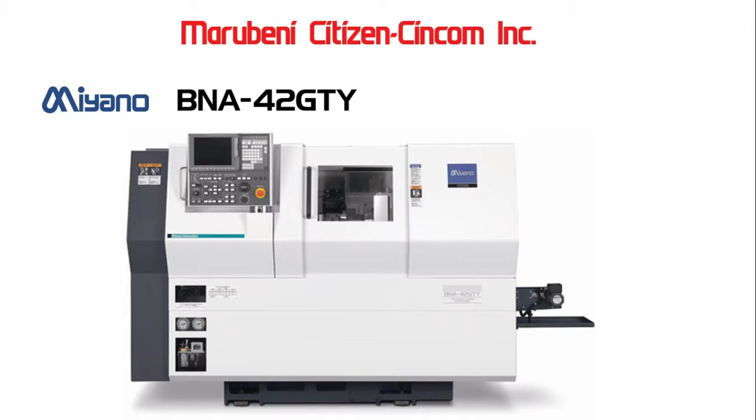As you can see, the machine has a very small footprint. It weighs approximately 8,250 pounds.

The bed has been constructed like a platform to maintain flat surfaces and reduce deformation and distortion to minimize the effects of heat. The spindle and tool slide are mounted on this smooth and uniform surface, so even in the event of thermal expansion, the displacement is all in the same direction, which means that relative dislocation between the workpiece and the cutting tool can be controlled.

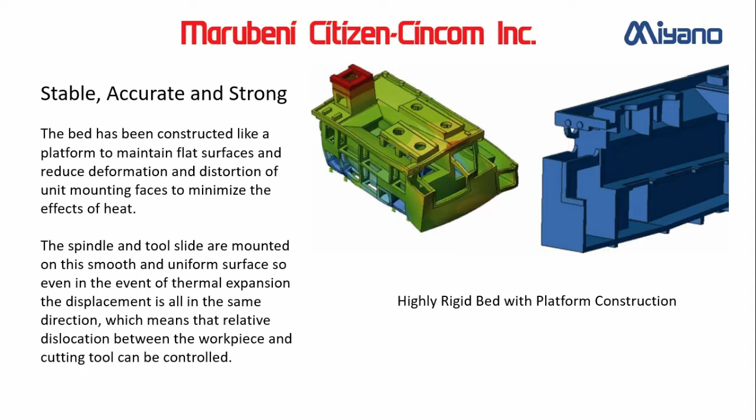The high rigidity spindle is a key component as it adopts angular contact ball bearings at the front and double row cylindrical bearings at the rear. Rotating accuracy is assured by the angular contact ball bearing, while the radial loads are supported by the double row of cylindrical roller bearings.

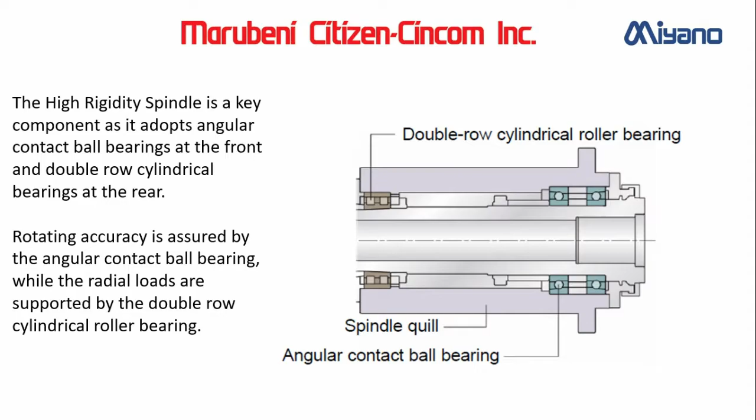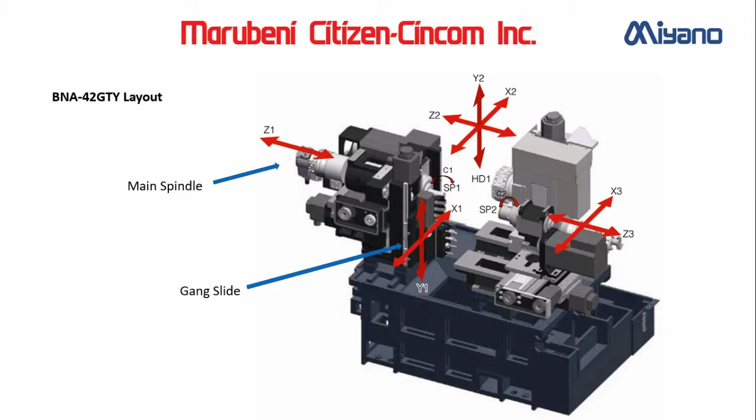Here we see the layout of the 10 axes on the GTY machine. On the left side we have the Z1 sliding head main spindle with full C axis. Located also on the left side is a gang slide X1, Y1. This slide has 3 turning stations and 3 live tools and cross-working positions for the front work.

A drilling block with 5 sleeve holder positions is attached to the same X1, Y1 slide that can be used for back work. The main turret has 8 positions for both fixed and live tooling. In addition, the turret has half index capability for additional tools.

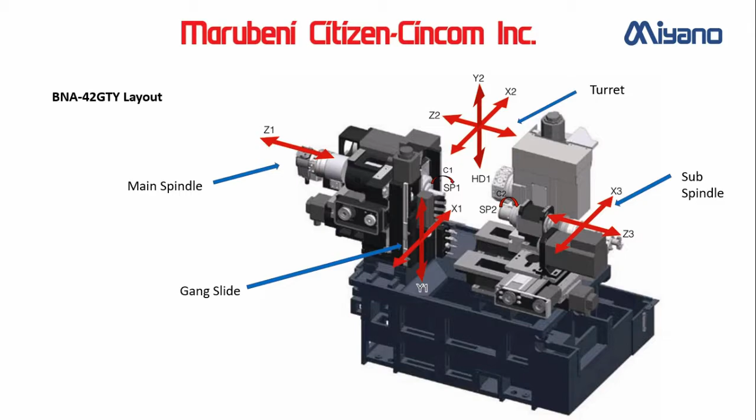With an X2, Y2 and Z2 axis on this turret, we have a much greater range of multi-head tools that can be utilized. The sub-spindle with full C axis and X and Z motion allows us to machine on both spindles at the same time with the main turret. The third tool from the gang plate can also be used in conjunction with the turret tools.

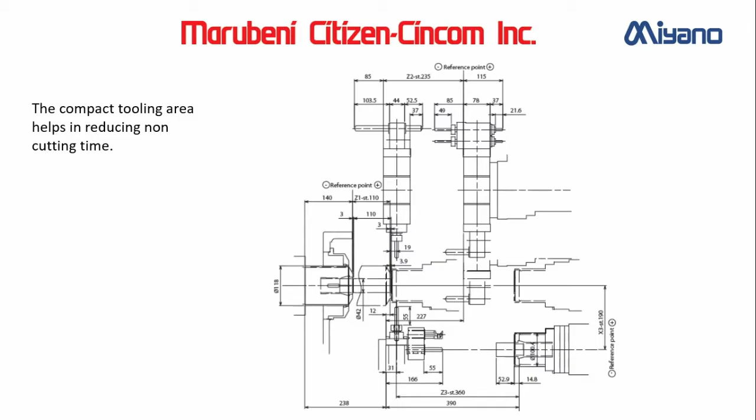Here we see the tooling area on the BNA-42GTY machine. The small work envelope helps in reducing cycle times. The layout of X1 and Y1 of the gang plate are shown here, along with the X2 and Y2 on the turret. Note that the optional 7-position back ID block is shown on the left.

Added benefits on the GTY are tool indexing time is shortened by adopting gang tools, cutting with up to 3 tools simultaneously with 3 axis control groups. The next higher class of spindle motor is adopted. This has the highest output of the BNA series.

Calculation speed is increased with the NC controller, the Mitsubishi M730VS. Machine performance is maximized with the Cincom control, and the machine is compact in size despite having 3 axis control groups.

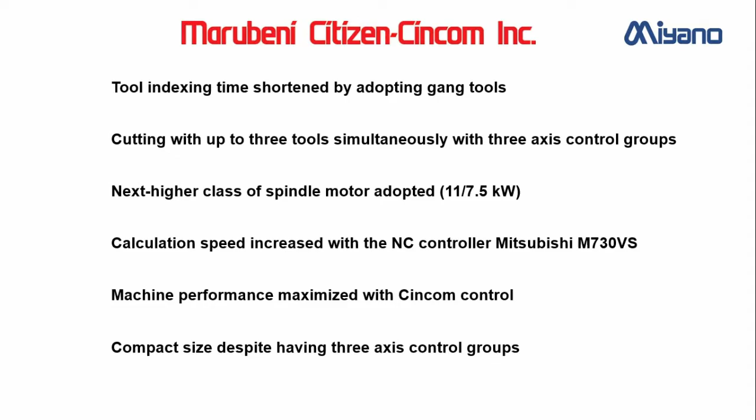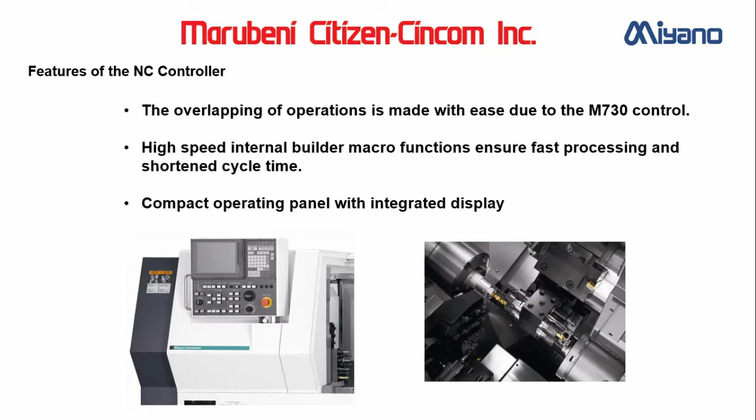Features of the NC controller are the ease of overlapping operations due to the M730 control, the high-speed processing of builder macro functions that shorten cycle times. It has a compact operating panel with an integrated display.

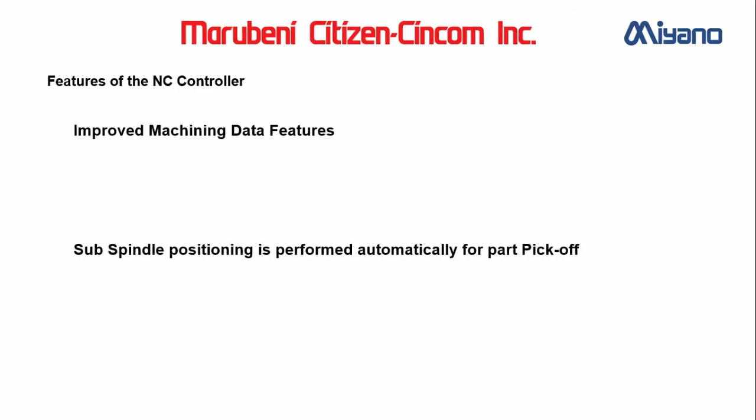Continuing with features of the NC controller, we have improved machining data features. Sub-spindle positioning is performed automatically for part pickoff. It performs automatic setting of work coordinates, automatic G50. The turret can move to a safe position by a T-code command, and simplified programming by using special G and M codes.

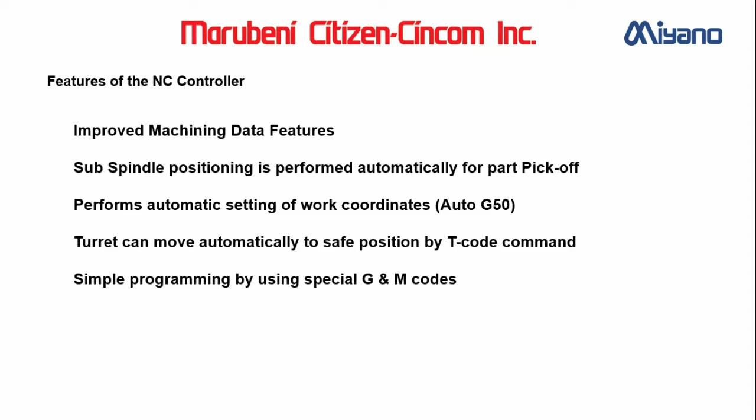Low frequency vibration is now available on the GTY series for the X1 and Z1 axis. What is low frequency vibration? In general terms, low frequency vibration cutting is where a servo-controlled axis generates vibration behavior in an axial direction. Machining is then carried out while synchronizing this vibration with spindle rotation. This creates air cutting time during machining and leads to intermittent chip disposal.

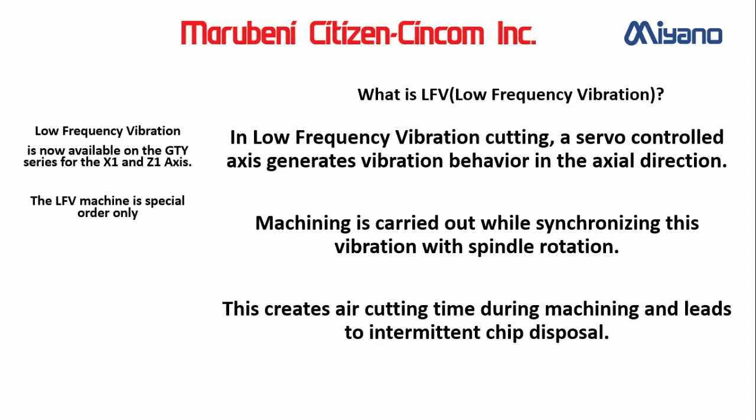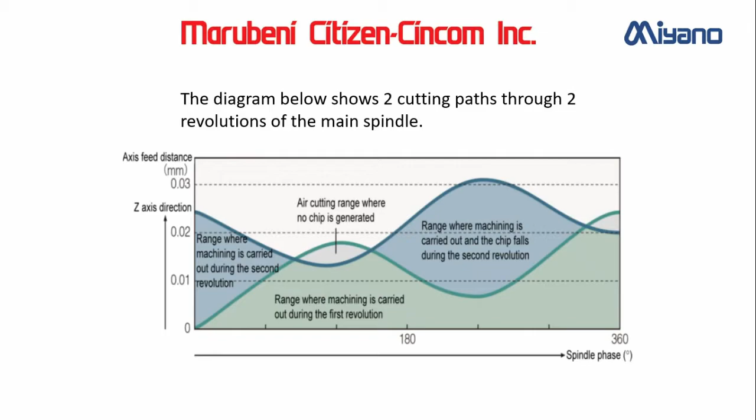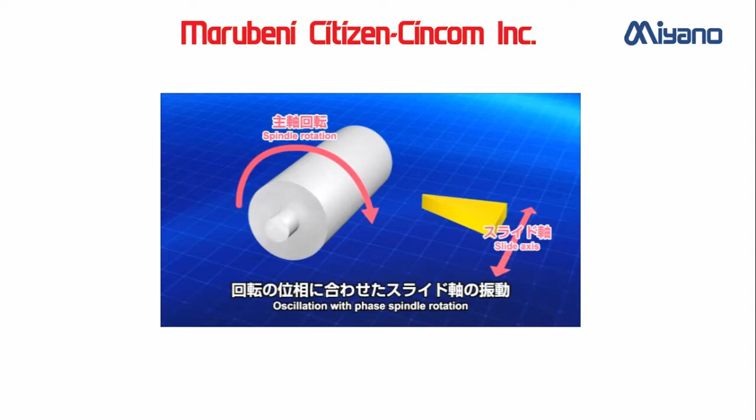The diagram below shows two cutting paths through two revolutions of the main spindle. The light blue area is showing the cutting area of the first revolution. The darker blue area shows the cutting area during the second revolution. This video graphic shows the cutting paths as described in the previous slide. Oscillation that is synchronized with the rotation of the spindle. It is also phased with spindle rotation.

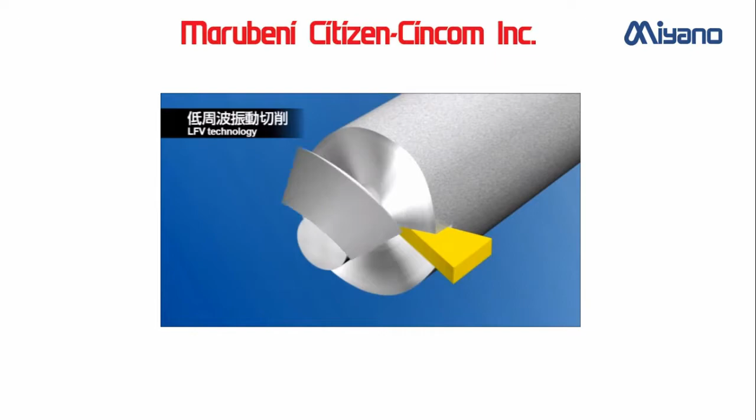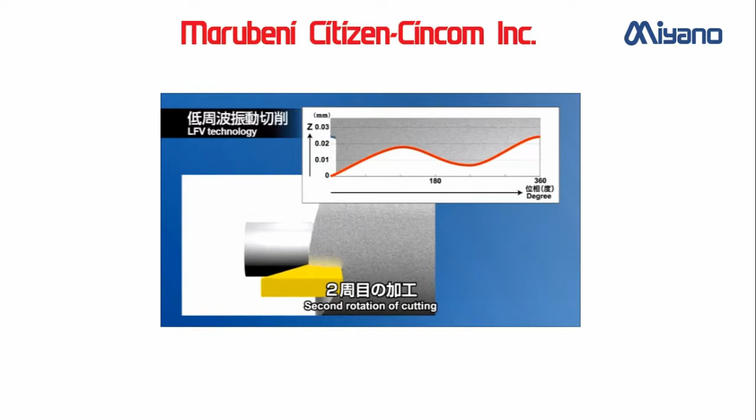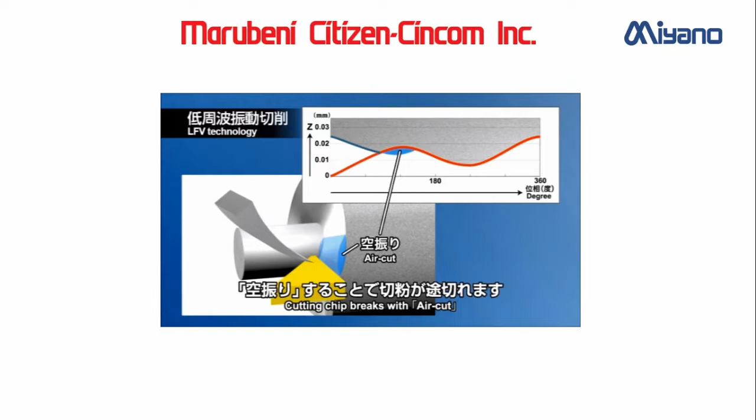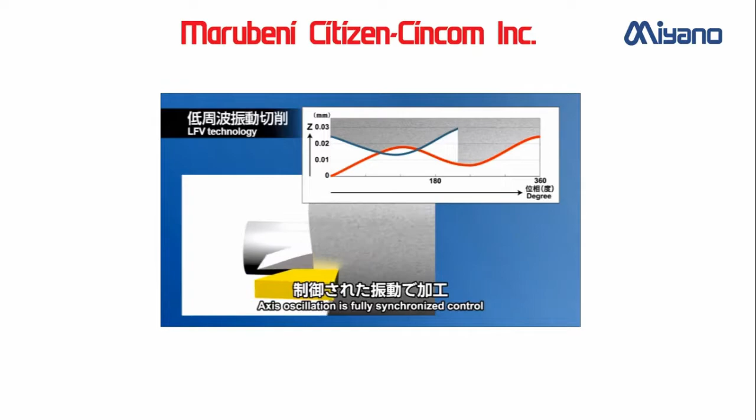Here we are seeing the oscillation during cutting, which breaks the chip. This leaves a corrugated surface. The high spots are removed on the second rotation of the spindle. The air cut breaks the chip. When the axis reaches the programmed endpoint, the oscillation stops and a flat surface is formed.

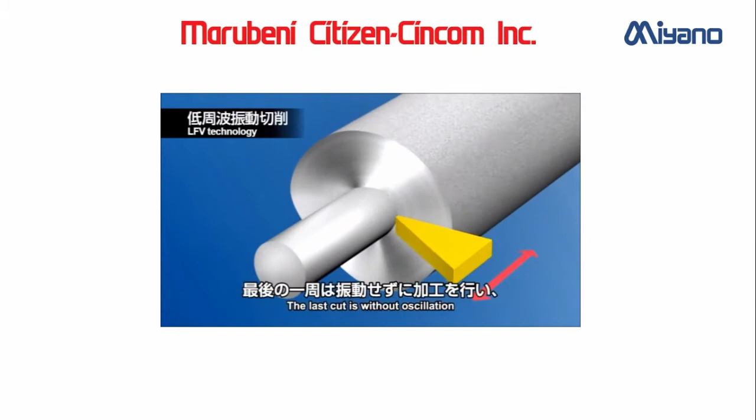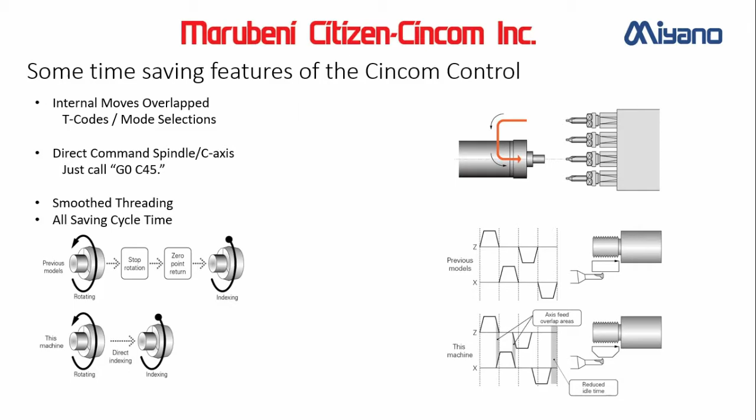Here we see some of the time-saving features within the control. Tool calls can be made along with axis positioning. Direct C-axis command. Go from turning to a milling process with a simple G0 C45 command. No need to send Z-axis to reference home. Smooth threading cycles, shortcut positioning. The lower right image is showing a toolpath with shortened movement, all saving cycle time.

Hey Tim, I got a question here. Yeah. What is the lead time for the GTY machine purchased with LFV? The lead time would be between 5 and 6 months after the order is placed. Thank you. Yep.

Here's a list of the GTY's general machine specifications for your review. Main spindle 6,000 RPM, sub and live tooling 5,000 RPM. Standard machining length on the Z1 axis is based on the Z1 axis stroke.

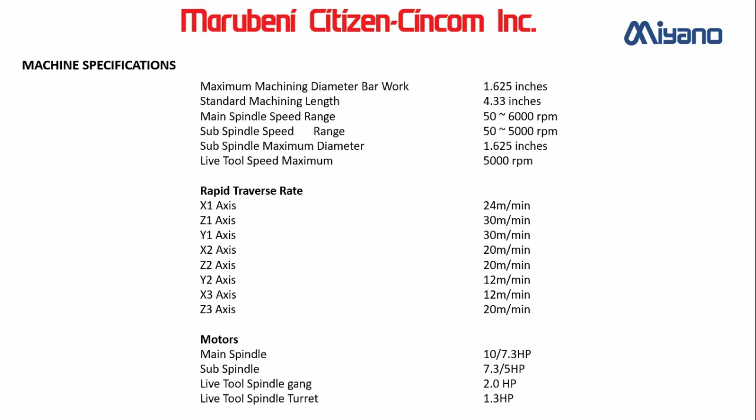The main spindle chucking has a DIN 173E system as standard. The unit accepts B42 and TF48 style collets. The main spindle draw tube is 43 millimeters in diameter. And the machine comes with 4 spindle liners or filler tubes of various sizes for the main spindle.

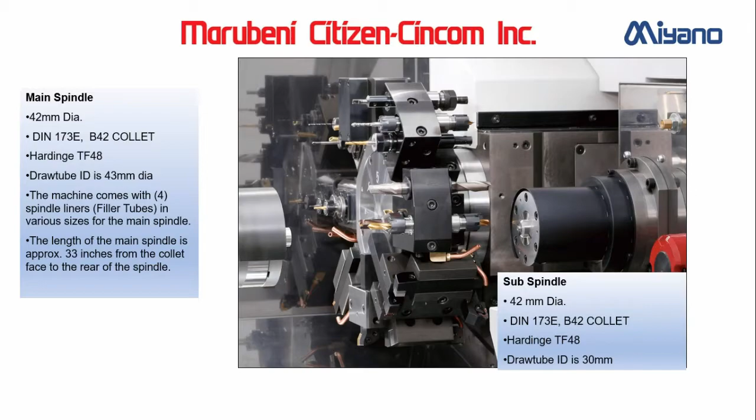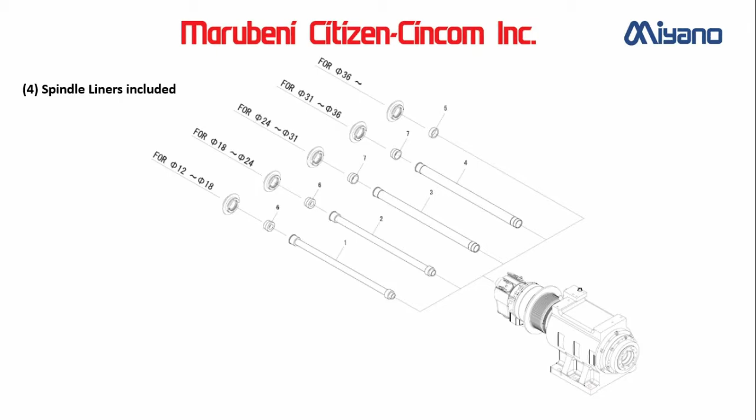The length of the main spindle is approximately 33 inches from the collet face to the rear of the spindle. Sub-spindle accepts the same collet as the main, however the draw tube ID is 30 millimeters in diameter. Here's a list of sizes of the 4 spindle liners included with the machine. The machine comes with either a hinge type chip conveyor or a 250 micron filter type conveyor.

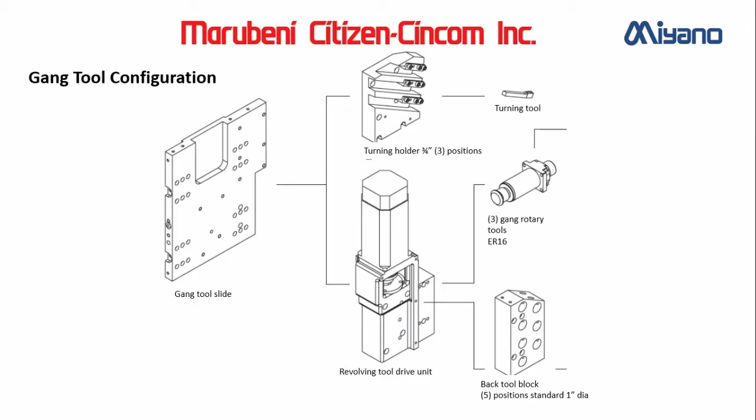The gang tool layout has 3 turning stations that accept 3/4 inch shank tools. The 3 rotary spindles on the gang accept ER16 collets, but the turning and rotary tools are for use on the main spindle side. Attached to the same gang plate, we have a back tool block with 5 sleeve locations that are 1 inch in diameter.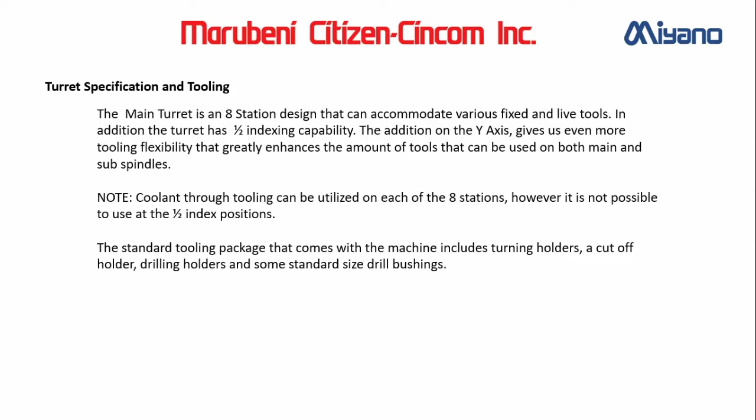The addition of the Y-axis gives us more tool flexibility that greatly enhances the amount of tools that can be used on both main and sub spindles. Coolant through tooling can be utilized on each of the 8 stations and has a pressure of around 135 psi. The image on the left shows the turret with multi-position tool holders. The image on the right shows the turret live tool drive mechanism. The tools are driven via tang drive.

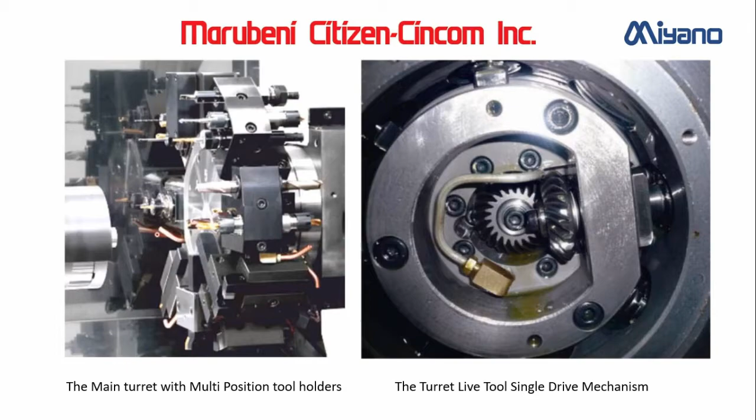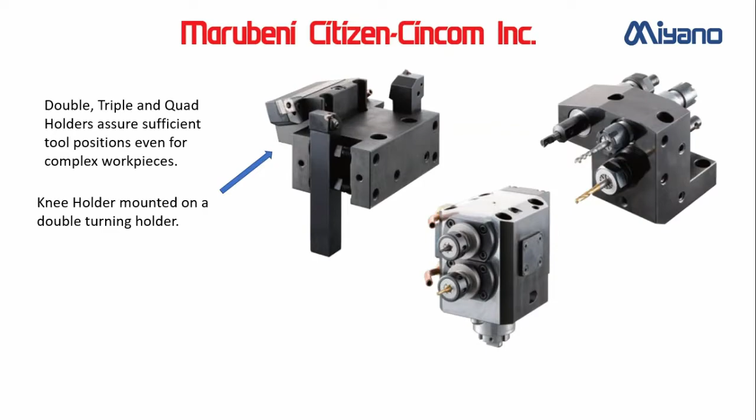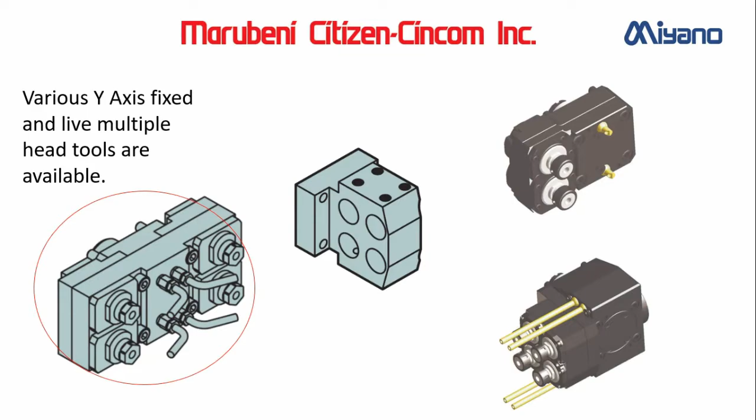Double, triple, quad holders give us sufficient tool positions, even for complex workpieces. Various Y-axis fixed and multiple live tool heads are available. We have here a quad cross drilling holder, 2 live for the front side and 2 live for the back side. The turret will accept tooling from all other BNA series models. Standard tooling package comes with a variety of OD and ID tooling. The triple plain head holder utilizes the half index feature on the machine.

Hey Tim, we have a question here. What size drill sleeve holders does the optional 7-position rear tool post use? 3/4 or 1? On the option, I believe they are 3/4 inch, but I would probably have to confirm that at a later date. I'll tell you, they're all 1 inch. 1 inch. Okay. Thank you, Brian.

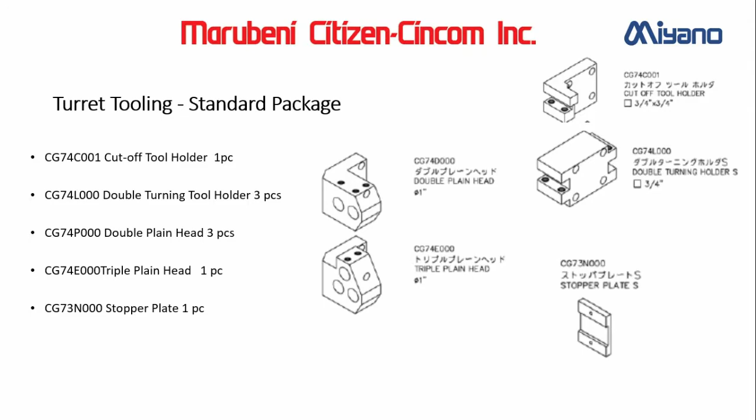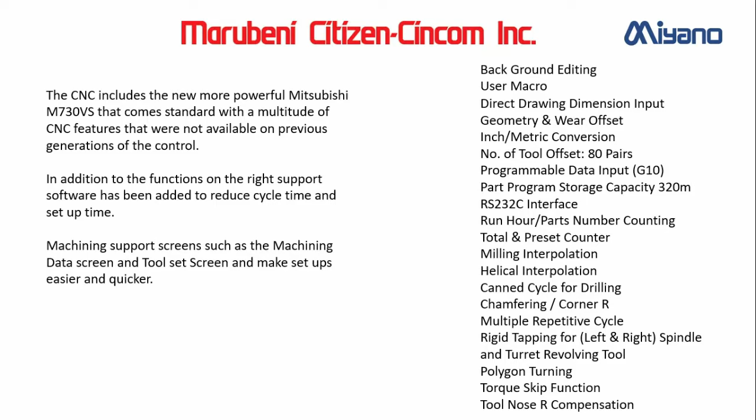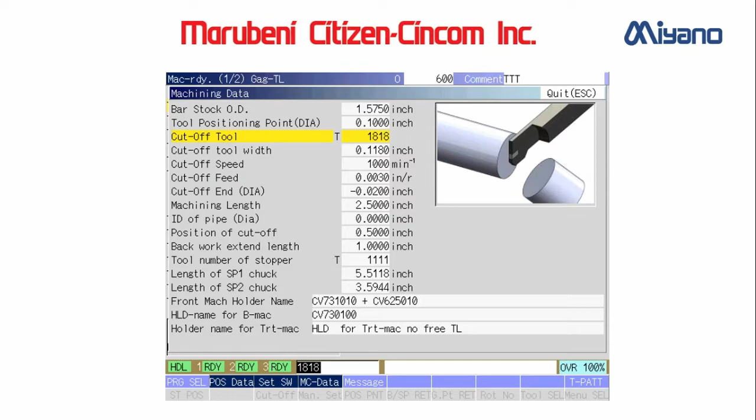CNC includes a more powerful Mitsubishi M730VS that comes standard with a multitude of CNC features that were not available on previous generations of the control. In addition to the functions on the right, support software has been added to reduce cycle time and setup time. Machining support screens, such as the machining data screen and toolset screen, make setups easier and quicker. Here we see the improved machining data page. Various items are entered, including the tool positioning point or clearance point value, location of the cutoff tool in the turret. This allows for an automatic cutoff similar to a Cincom Swiss machine.

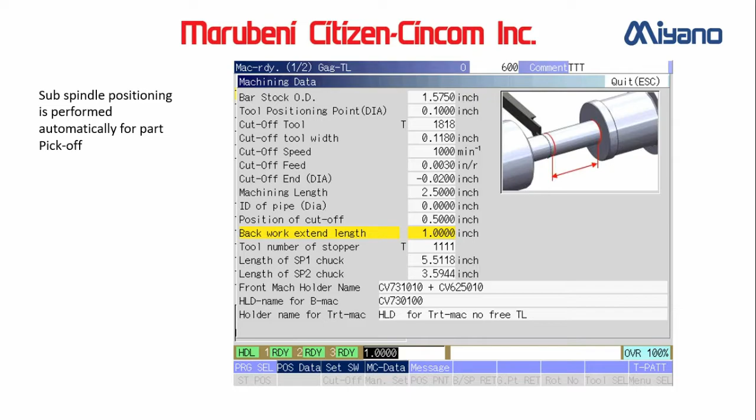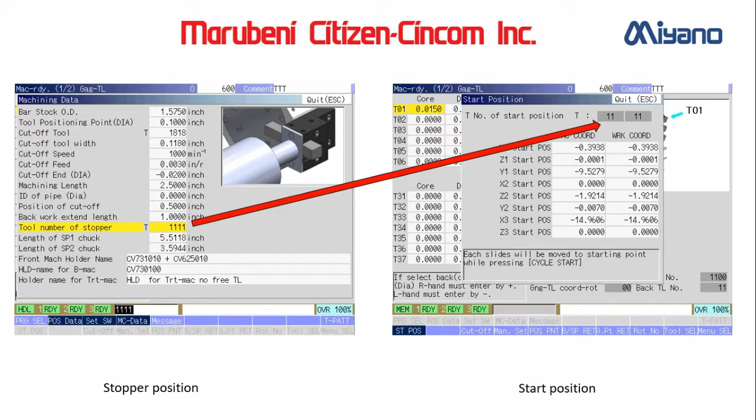As mentioned earlier, sub-spindle positioning is performed automatically for part pickoff. Here we see the machining data page that asks how far the part needs to be sticking out of the sub-spindle. The sub-spindle moves to the correct location without the need of giving a coordinate in the program. If a stopper is to be used, it is entered in the machining data file. When the start position key is activated, the machine will automatically index to the stopper position. Operator-friendly user screens make setups easier. Select the function and press the start key. No need to type in an activation code.

Tim, we got a question. Is there any thought of creating a back work block to utilize high pressure coolant through tools? I know of one customer in the New England area that requested this many years ago, and I believe we came up with a solution. I don't believe it's in the quotation, but I'm sure that there was a manifold for high pressure made for that back tool block. Thank you. Yeah.

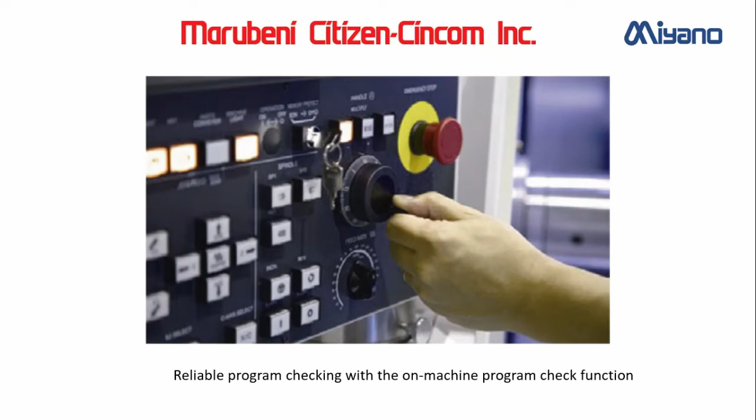Reliable program checking with on-machine program check function. Run through the program using the hand wheel. It's safe, it's easy, it's user-friendly. Program screens that improve operating convenience. The program screen is organized for easy reading. It can be displayed in synchronization with the editing screen. This simplifies the editing of complex programs with a lot of queuing.

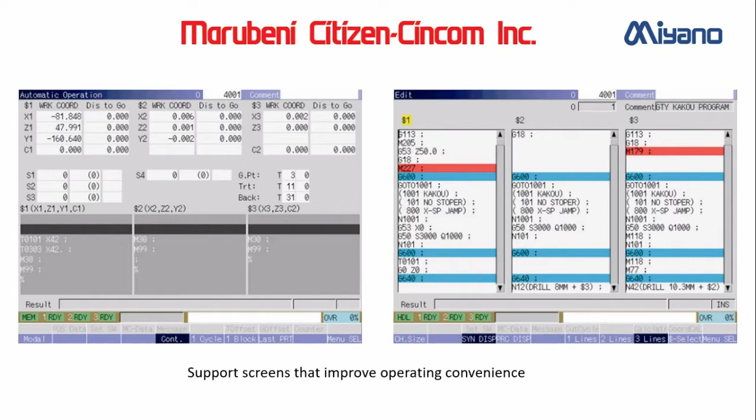The code list screen. This displays the list of G and M codes, including descriptions of the arguments to assist in programming. This makes it possible to check the basics about the codes without referring to an instruction manual. When editing the program, you can insert codes just by inputting an argument. We can see on the right side an explanation of a G114.2 code.

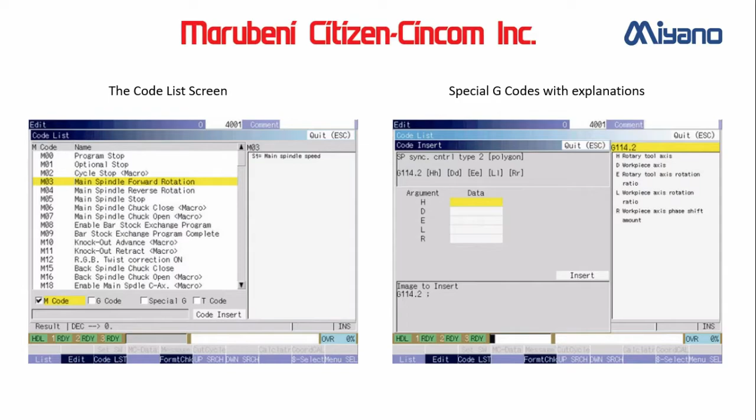For complex sequences of operations, such as superimposition machining, machining patterns are optimized for particular purposes and are registered as G codes. Cycle times can be shortened by making use of these G codes. They also enable efficient programming and shorten the operator setup time.

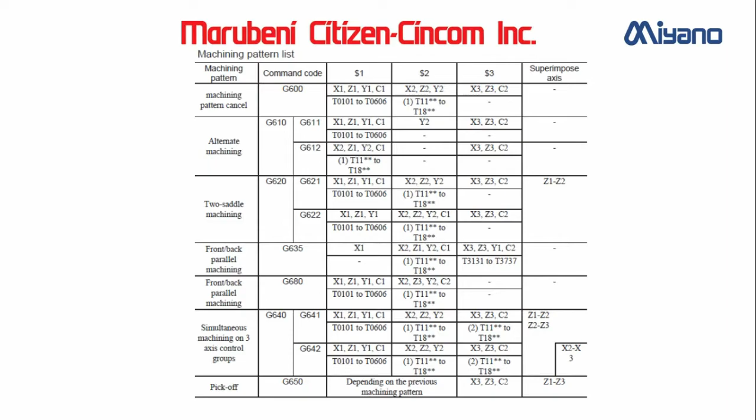Various options for simultaneous machining are available due to the unique layout of the axis and innovative tooling blocks. We can independently simultaneously machine with two tools. On the left side, we are turning the front with the turret and turning the back with the gang tool block. On the right side, we are milling the front with the turret and drilling the back with the gang.

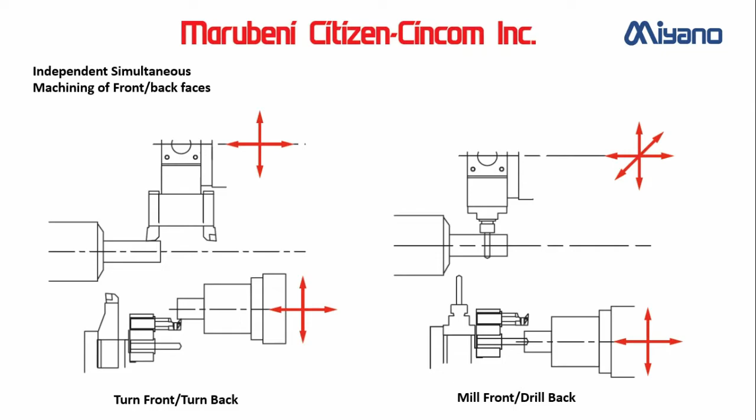Continuing with independent simultaneous machining with two tools. On the left side, we are turning the front with the gang and turning the back with the turret. On the right side, we are milling the front with the gang tools and milling the back with the turret.

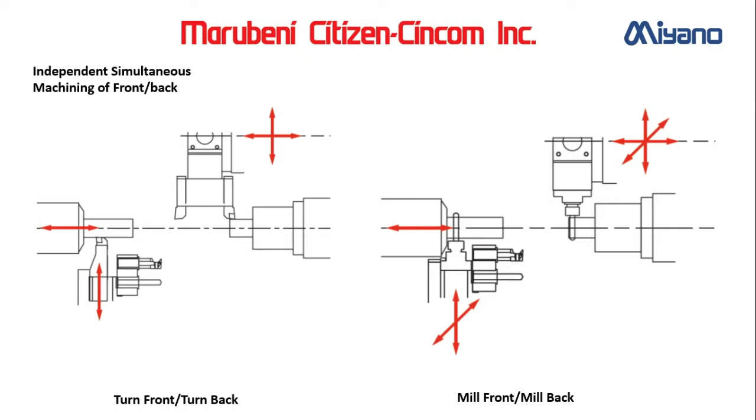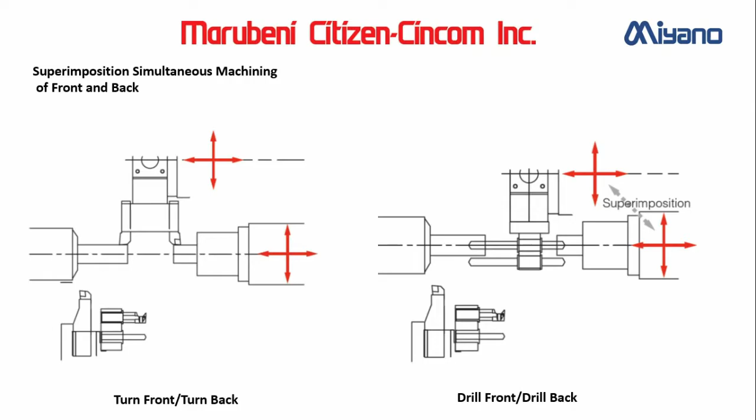Superimposition, simultaneous machining of front and back. On the left side, we are turning the front and back with the turret. The X3 and Z3 on the subspindle are superimposed with the X2 and Z2 motion of the turret. On the right side, we are drilling the front and back with the turret. The Z3 on the subspindle is superimposed with the Z2 motion of the turret.

Superimposition, simultaneous machining with two tools at the main spindle. On the left side, we are turning with two tools, rough turn, finish turn, or pinch rough turning. The Z2 on the turret is superimposed with the Z1 on the main spindle. On the right side, we are cross drilling with both the gang and the turret live tools.

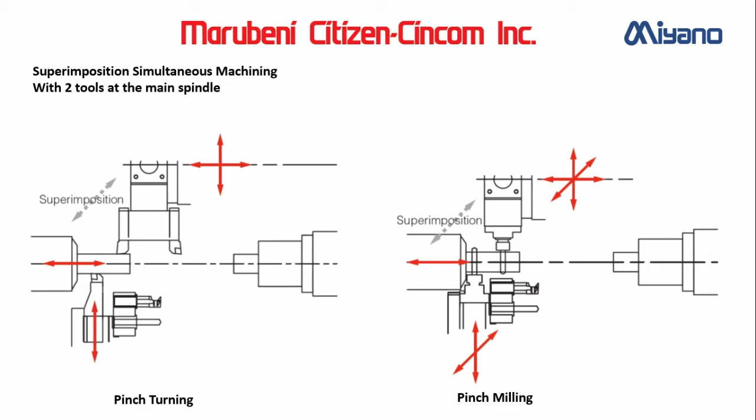Superimposition and simultaneous machining with three tools. On the left side, we are pinch turning on the main spindle, rough turn, finish turn, or pinch rough turning. The Z2 turret slide is superimposed with the Z1 on the main spindle. At the same time, we are turning the back on the subspindle. The X3 and Z3 are superimposed with the X2 and Z2 on the turret.

On the right side, we are turning with the gang tools while drilling with the turret on the main spindle and the subspindle.

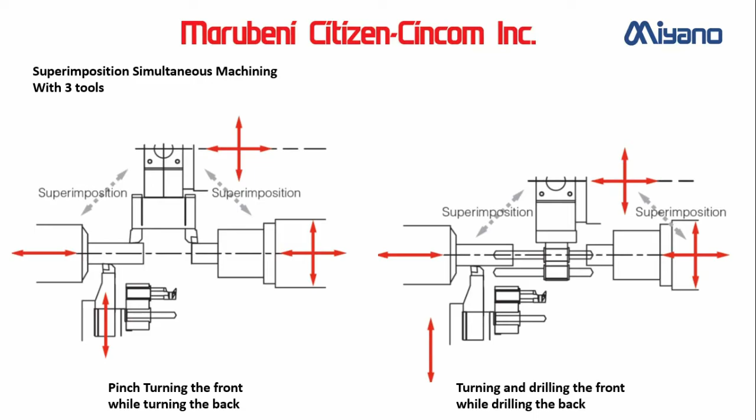Setting the tool blocks on the turret of the BNA-GTY involves selecting a tool holder for each turret position. Here we see a double plane head being selected. The geometry for the H locations are recalled by the machine when the holder is selected. There is no need for X tool data.

The offsets to be used for the locations are then defined by the operator. The holder that is selected is saved with the program.

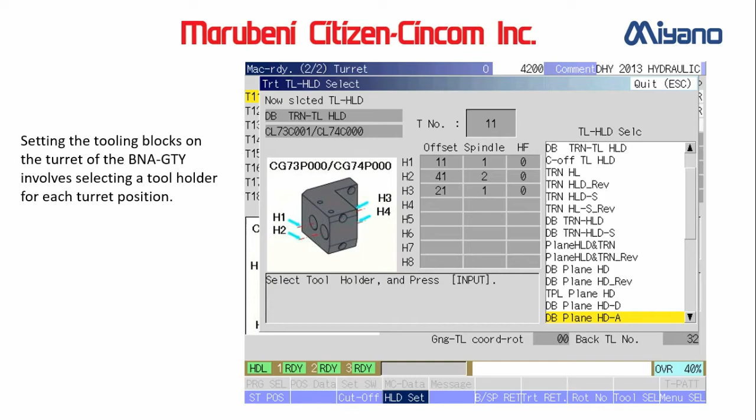The offsets are registered to each tool holder. Here we have a double turning block that is assigned three offsets: T1111, T1141, and T1121. If we call up a T1151 in the program, an alarm will occur as the offset is not registered with this tool holder.

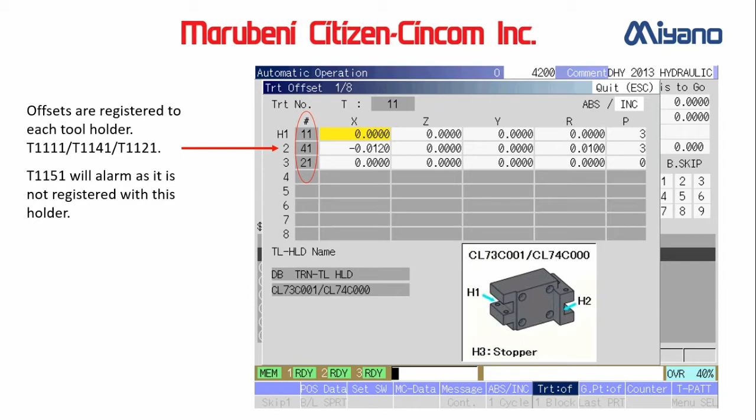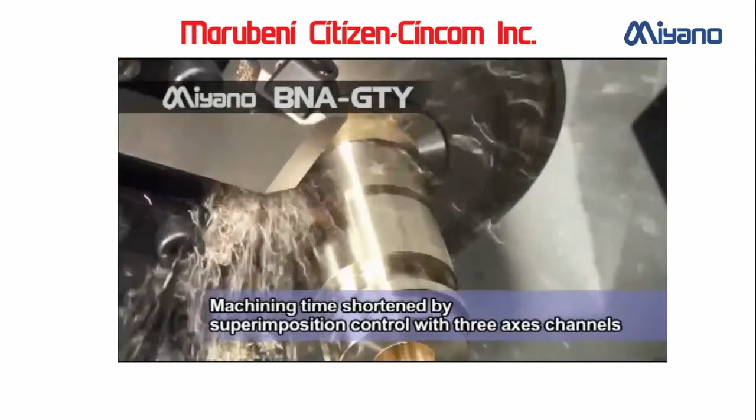Here's a short video of the GTY in action. Turning with the gang tools on the main spindle while drilling the front side and the back side with the turret. Then grooving the front while boring the front and back with the turret.

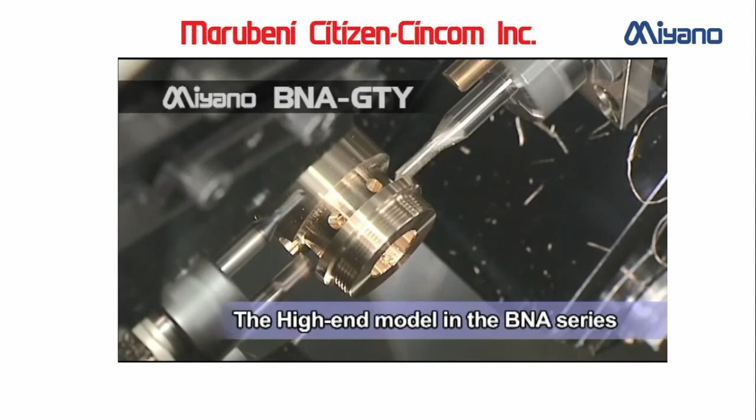Cross drilling the front with the turret while machining the ID on the back with the gang ID tools. Rigid tapping is standard on all spindles, pinch milling on the front side with the gang and turret live tools. Having two opposing y-axis allows for greater flexibility in machining. Milling the front and back with the turret with a double-ended live tool.

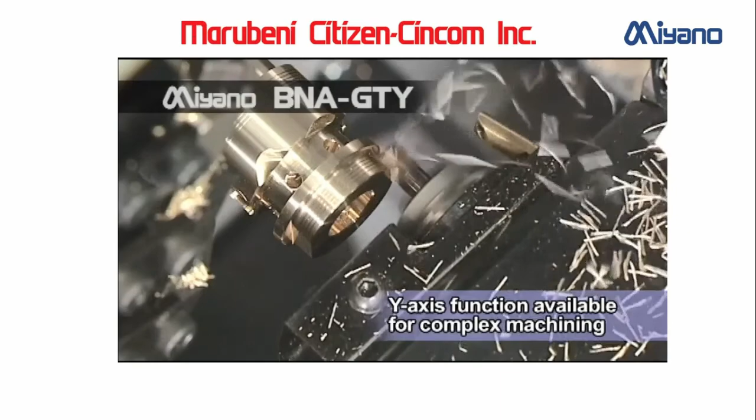Finally, we pick off and cut off. Special G codes simplify all of these features.

This was a project. It was for an AR-15 sight bases, back sight and a front sight. These parts were previously done on a machining center using extruded aluminum that had to be pre-cut. It was then fixtured on a mill, and it took 5 to 6 secondary operations using different fixtures. The total cycle time on the mills was about 3 minutes.

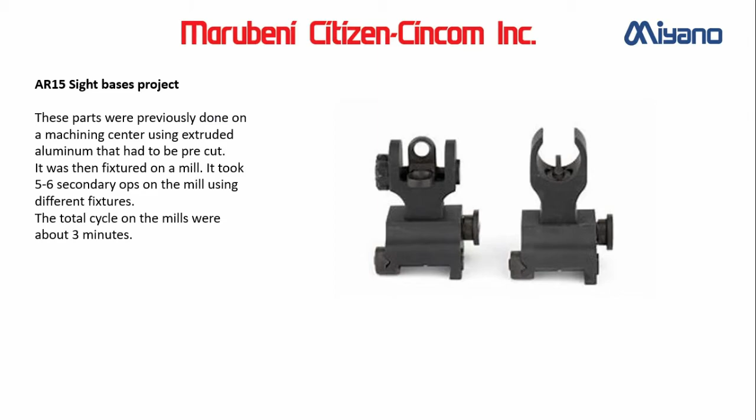So that's cycle time. That's the cutting of the extruded bar stock. That's the fixturing, loading, unloading. On top of that, 3 minutes.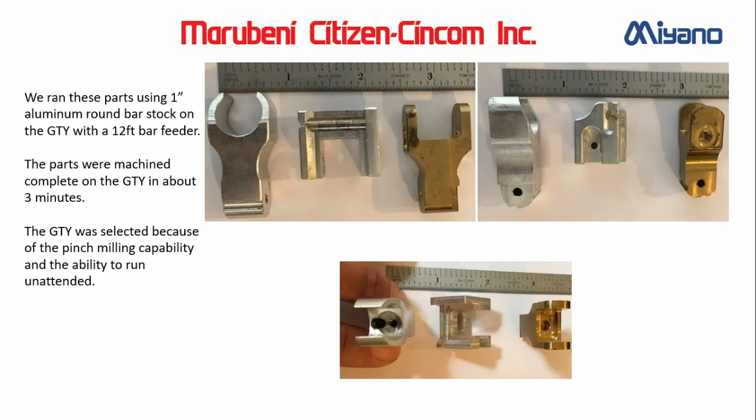Here's a short video of the front sight being machined on the GTY. The front end is faced, then turned with the gang tools. Then the turret is used to groove a relief for the milling. Now we're pinch milling on the front side. This reduces cycle time and stabilizes the cutting process.

The milling continues on the front side while the back side machining begins. We are contour milling on the subspindle side. Live face drilling on the sub side. Drilling on the sub side. And finally, rigid tapping on the sub side.

The square profile collet was used to pick off the part using synchronized spindle and phasing.